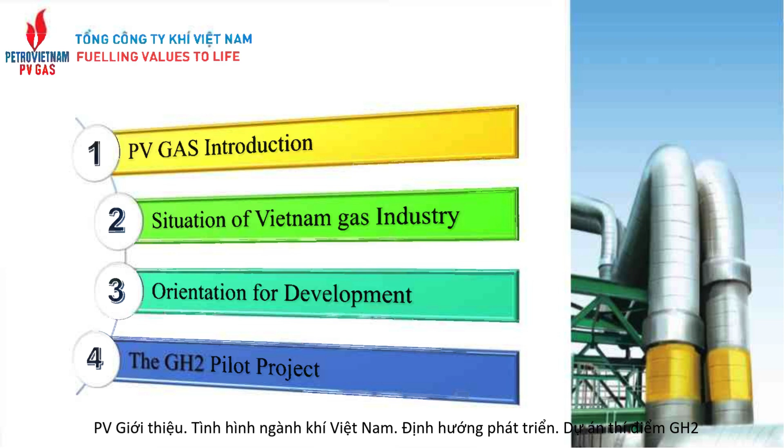PV Gas brief introduction and overview. Established in 1990, PV Gas is owned by Petro-Vietnam, holding 95.76% of total shares.

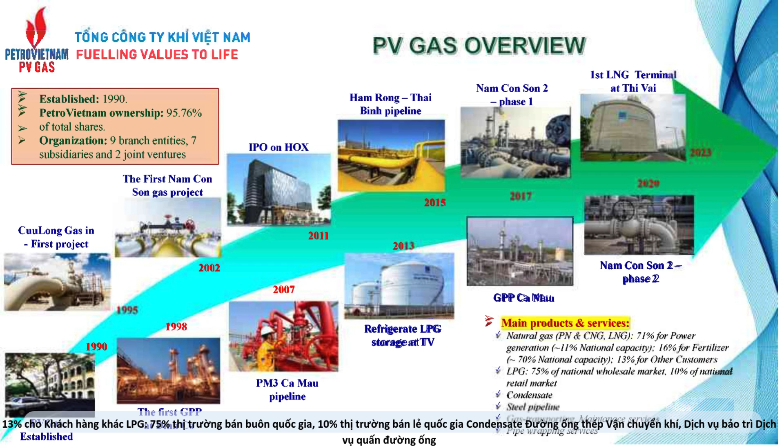Organization includes 9 branch entities, 7 subsidiaries, and 2 joint ventures. Main products and services include natural gas, PNG and CNG, LNG for power generation (approximately 11% of national capacity), fertilizer (approximately 70% of national capacity), LPG (75% of national wholesale market, 10% of national retail market), condensate, steel pipeline, gas transporting, maintenance services, and pipe wrapping services.

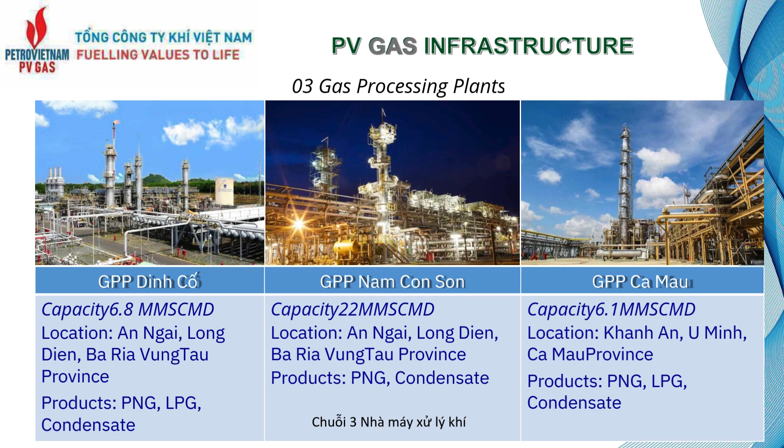The gas value chain. PV Gas infrastructure covers nationwide gas business infrastructure and main gas pipeline systems, including gas processing plants, LNG terminal, central port, and storage for gas import-export, supporting domestic gas production and supply.

Before 2020, peak gas exploitation reached 10 billion cubic meters per year. Since 2020, gas exploited from traditional areas such as Cuu Long Basin and Nam Con Son has decreased sharply.

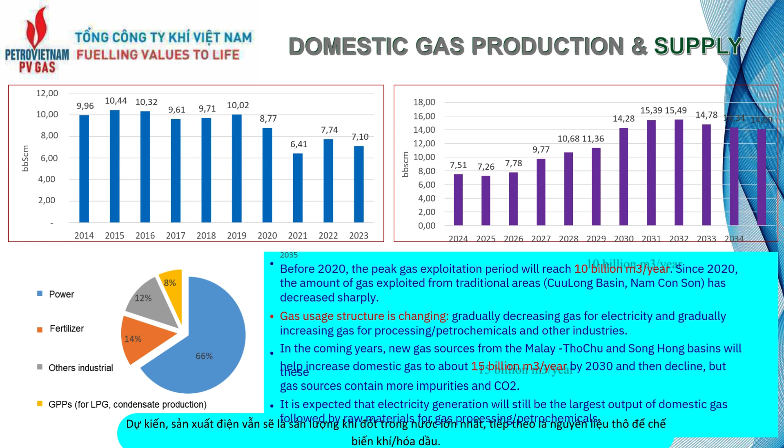Gas usage structure is changing, gradually decreasing gas for electricity and increasing gas for processing, petrochemicals, and other industries. In the coming years, new gas sources from Malay Tho Chu and Song Hong basins will help increase domestic gas to about 15 billion cubic meters per year by 2030, then decline. These new sources contain more impurities and CO2. Electricity generation is expected to remain the largest output of domestic gas, followed by raw materials for gas processing and petrochemicals.

Situation of Vietnam's gas industry, PDP-8, and Vietnam Master Plan. Electricity output by source shows the proportion of gas and LNG gradually transitioning.

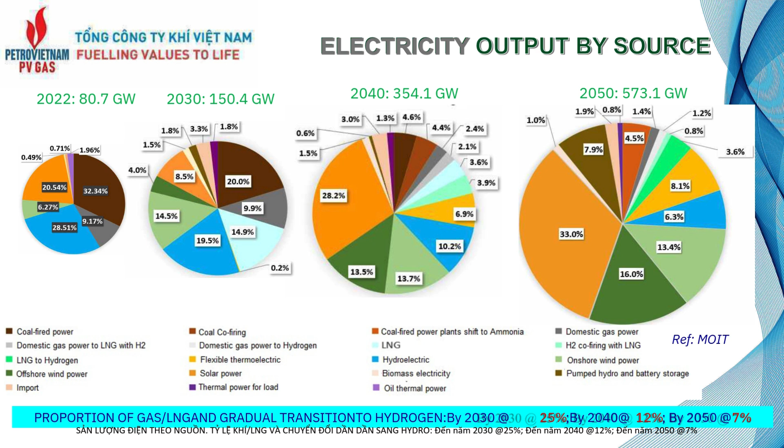Transition to hydrogen: by 2030 at 25%, by 2040 at 12%, by 2050 at 7%.

Gas and LNG demand is continuously increasing, both for power generation and other industries, especially as raw material for petrochemicals. Orientation is to prioritize domestic gas for industries, especially processing and petrochemicals, to increase gas value. Plans include building new LNG power plants and gradually converting current gas power plants to LNG and GH2.

Decision 165/QD-TTg, focuses on developing Vietnam's hydrogen energy ecosystem based on renewable energy, including production, storage, transportation, distribution, domestic use, and export, with synchronous and modern infrastructure to contribute to ensuring energy security and realizing the national target of net zero emissions by 2050. Targets are 100-500 ktpa by 2030 and 10-20 mtpa by 2050.

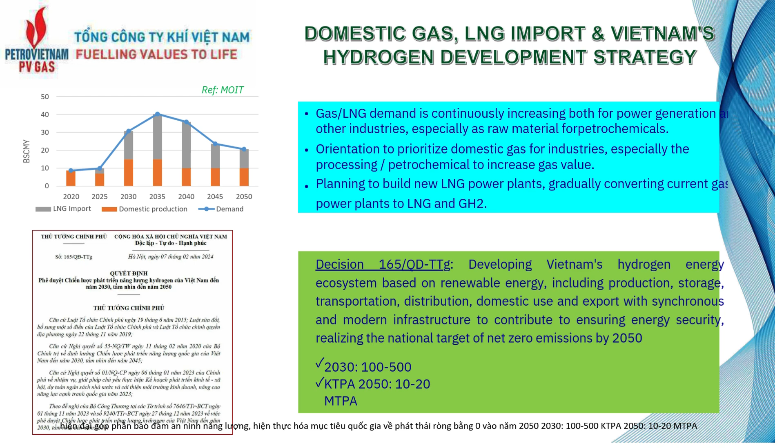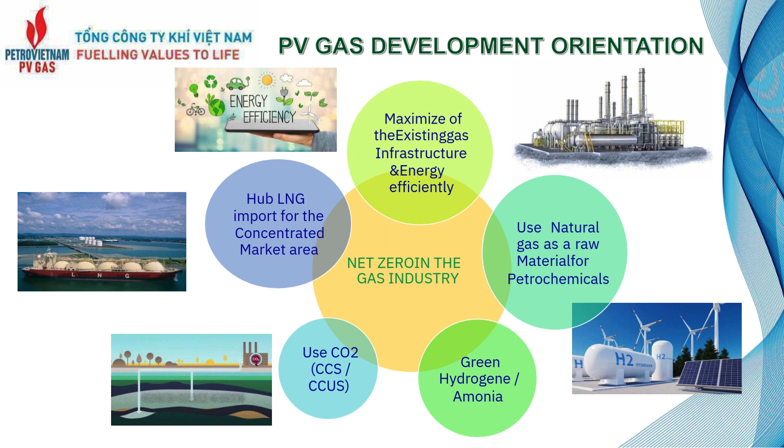PV Gas development orientation. PV Gas has leading capacity and experience in Vietnam in the field of LNG and will deploy LNG import hubs to capture 50% of the LNG market share nationwide.

LNG Thi Vai is in operation at 1 million TPA as of 2023, and will expand to 3-6 million TPA by 2026 at FEED stage. Son My LNG targets 3-6 million TPA by 2026 at pre-FS stage. Other projects include Thai Binh LNG, Vung Ang LNG, and Southwest LNG.

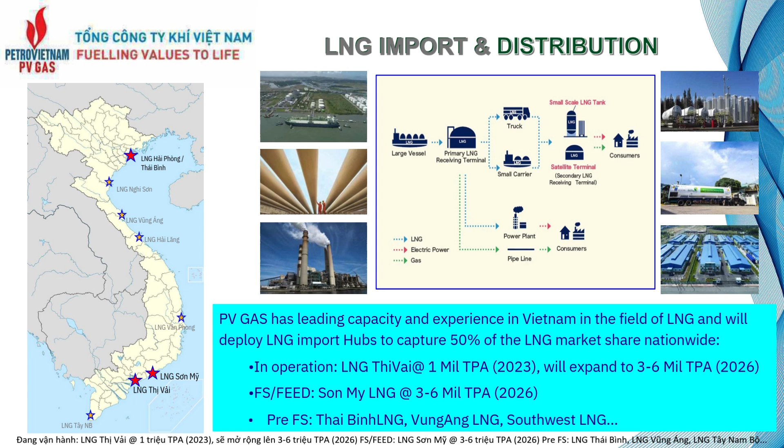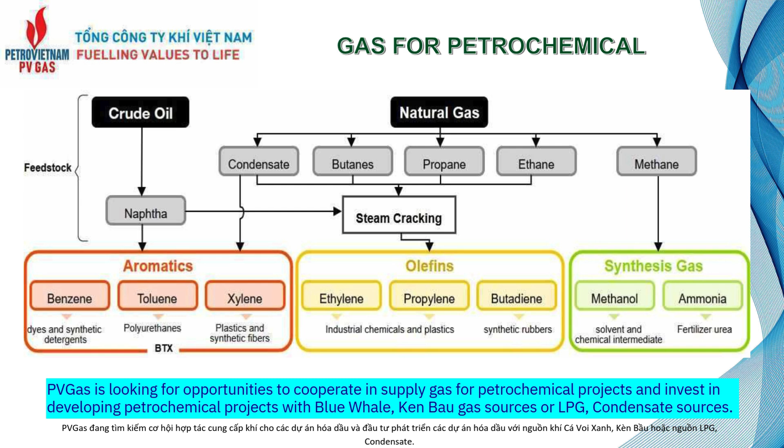Gas for petrochemicals: PV Gas is looking for opportunities to cooperate in supplying gas for petrochemical projects and investing in developing petrochemical projects using Blue Whale or Ken Bau gas sources, or LPG and condensate sources.

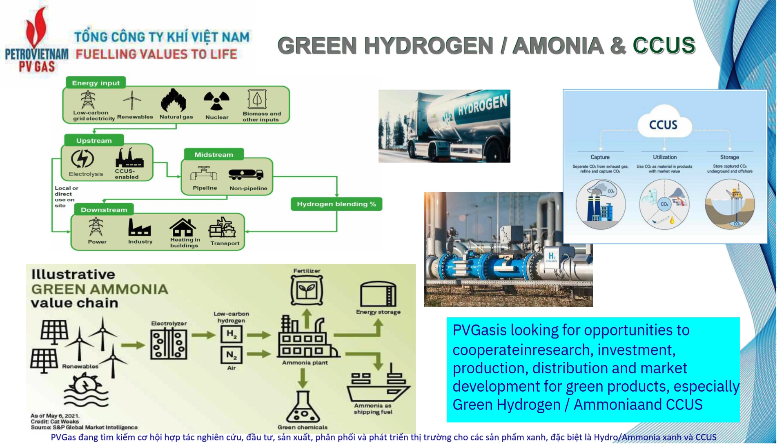PV Gas is looking for opportunities to cooperate in research, investment, production, distribution, and market development for green products, especially green hydrogen, ammonia, and CCUS.

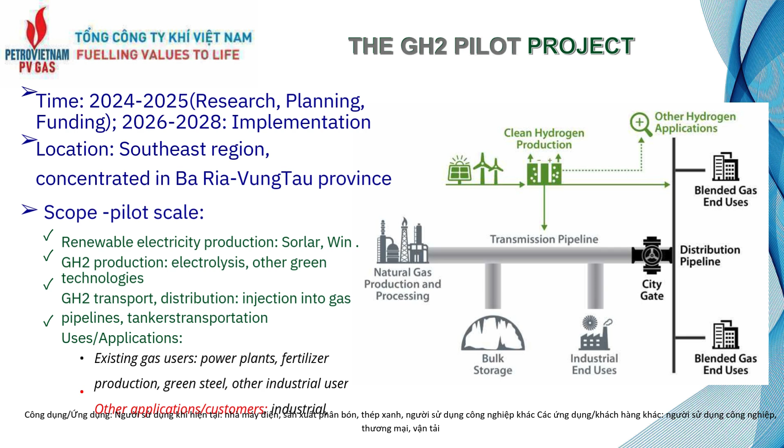Cooperation: PV Gas is looking for partners to jointly implement the pilot project, including partners for testing GH2 production, transportation and distribution technology, partners for testing and using GH2 products from the project, and partners for providing technology and equipment.

Capital: PV Gas R&D funding, R&D funding from participants, and other funding sources from the government, green funding sources, and JETP.